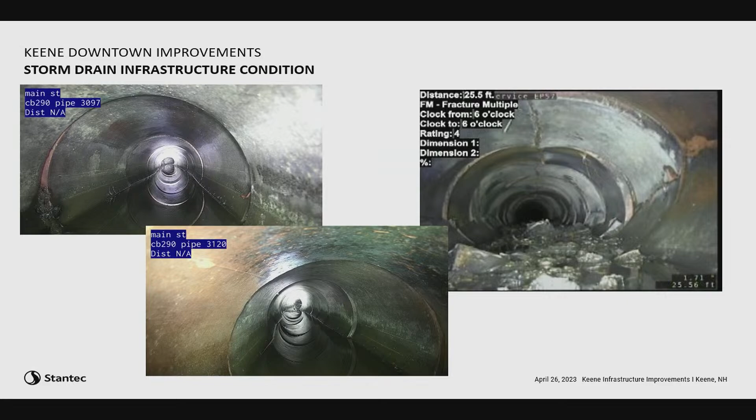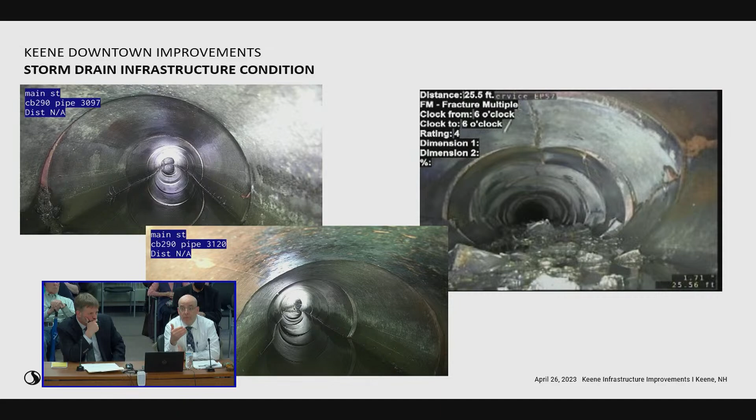These three photos happen to be from the central square, but most of the pipes on Main Street are 8 to 12 inch, and most of them, all of them, are undersized. The good news is that the drainage pipes on the downstream end, Roxbury Street, Railroad Square, and Water Street, have all been increased over the years on previous projects. So they're ready to receive more flow. We just got to get it there.

In addition to the underground problems, there are also above-ground issues with ponding and puddling in areas where the drainage isn't even getting to some of the catch basins. So what this shows is kind of a wholesale reconstruction of the drainage system. The exact locations of catch basins would have to be determined in the final design when curbing and the street layout is better known. But this is basically the intent here.

You can see running mostly down the middle would be a larger trunk line that will pick up the drainage from the catch basins on the edges. So every catch basin would run directly to that trunk line, which is going to improve the water quality a little bit as well, because it won't have water flowing catch basin to catch basin, stirring up the solids. The solids will be able to settle out in the catch basins, and the water will flow into that trunk line.

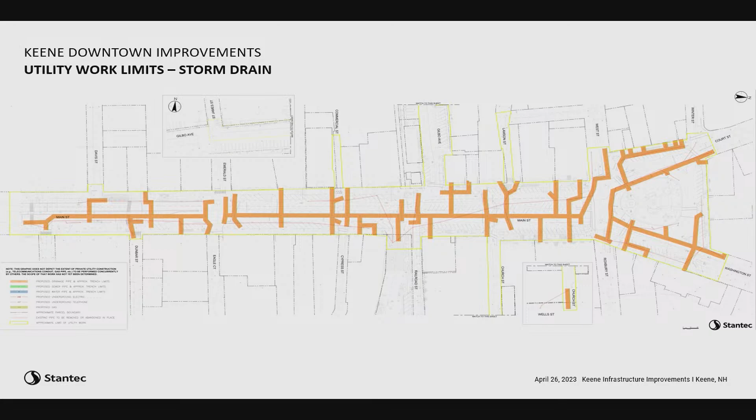That trunk line will then go to essentially the three different systems that Don just mentioned: Water, Railroad, and Roxbury. Those systems will stay together, and the water will flow into those. Overall, it's about 4,500 feet of pipe. That pipe's going to be 12 to 36 inches in diameter, and we're probably looking at roughly 100 structures between basins and manholes to move that around.

Okay, so the next system is going to be sewer, and I'm going to talk extra fast because I've been given 10 minutes. We got a quick question here. Councilor Greenwald: Where does this all exit?

The downstream end. So we're going to connect to the existing systems on Water Street, Railroad Square, and Roxbury. Those are the three big discharge points for the work. Gilbo, not Emerald? No, I don't think Emerald—there's anything that goes down Emerald Street. Gilbo, I think, would stay on its own.

So any improvements on Gilbo would stay on Gilbo. Most of Main Street goes to Railroad. The southern end from around Emerald south goes to Water. And then really the central square area all goes to Roxbury. But eventually it goes to the Ashuelot River. Everything, those three systems, Roxbury, Water, and Railroad, all go to Beaver Brook, and then to the Ashuelot River.

Gilbo Ave currently drains towards the Ashuelot, and that'll remain. Same with Lamson. Tom's got a quick question too.

So for that reason, if you wanted to section this up and do different parts, you wouldn't have too many problems, because it's not going down Main Street. Yeah, there's sort of logical phasing breakpoints that we've talked about, and we've shown some phasing plans that anticipated that. Unfortunately, those logical breakpoints aren't the same for all of the different utility systems. So in any case, when you're breaking it up and having some temporary work, there's going to be a little bit of that temporary configuration and rework the next spring, that sort of thing. But yeah, there are some logical breakpoints for phasing purposes.

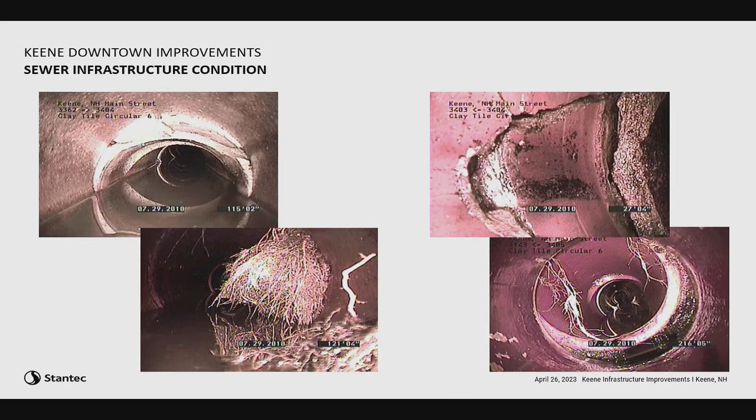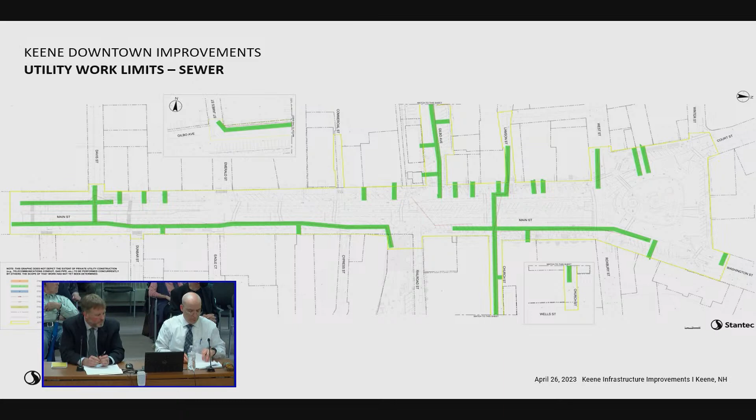That's some larger pipe that was lined in about 2004, so 15 or 20 years ago, running from about Davis up through Court. We wouldn't be doing any work on that, that pipe's in good shape. It's a little bit bigger than the 6-inch pipe on the northbound side.

There are some services along there that weren't upgraded at the time, and they have the same susceptibilities that the main and those pictures show, so those would be replaced. Then along the north side and a few of the side streets, that's where the smaller 6-inch clay is still in place. We'd upgrade that to an 8-inch and replace it all the way through there.

So in total, I think we're looking at about 3,000 feet of sewer pipe, 35 manholes, and about 20 to 25 services to be replaced as part of this work.

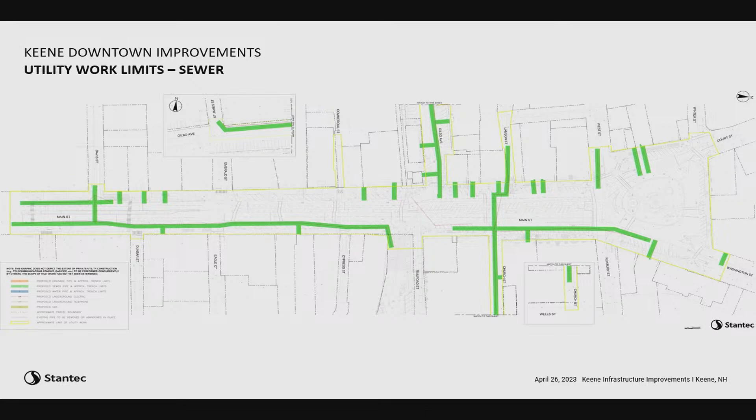Now, unfortunately, I don't have any cool pictures of the water system. We don't have any equipment that can look inside the water pipes while they're still in service. They do have systems that can do it, but we don't have that. So instead, I brought some props.

This is actually a service valve that would have served somebody's house. This one was taken off of the Court Street service. But if you use your imagination, picture this instead of 1 inch, is 6 inches and much bigger. But that was too big for me to bring.

You can see in here, and I'll pass this around, the mineral deposits that have collected. It restricts the flow, but the real issue is that if you needed to turn this valve off because there was a water main break or service interruption, this valve couldn't be relied on to shut off. You wouldn't be able to stop the flow of water.

And I'm sure you've all seen pipes like this. I bring them whenever we have these sorts of events. This is a water main section that was cut out from a project. It looks kind of gross. In actuality, it's just mineral deposits that have come out of solution in the water, and they've attracted themselves and made deposits on the pipe itself.

So it's safe to drink. It's a little off-putting to look at. The real issue is the loss of capacity. So for a 6-inch main, this one's not too bad, but they can get pretty heavily tuberculated. And at that point, when you need that main for fire flows, it doesn't have enough capacity to move the water.

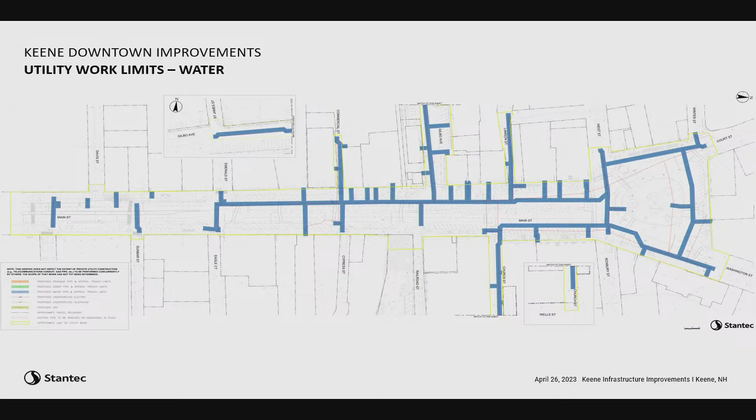Now, another question that we've gotten is, what evidence do we have that this work needs to be done, and what's the history of problems? So I did get a few stats from the water sewer crew. The cast iron water mains on Main Street, most of them were installed between 1891 and 1904, so they're well over 100 years. The average service life for a pipe like this, under best conditions, is about 100 years before we start seeing problems. So they're all past that.

In the last 3 years, we've responded to 4 water main breaks within the project limits. 2 were on Lamson, there was one at the intersection of Gilbo and St. James, and one at the intersection of Cypress and Main. So those were actual repairs.

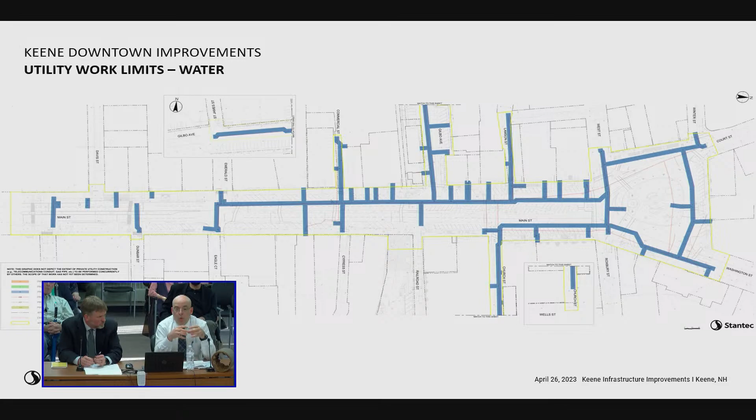The other component of the project that we talked a little bit about is the valves themselves. There's a number of valves through this project area. When one of them doesn't work, the issue becomes that you have to go to the next valve downstream in order to isolate the break.

And we saw that here with the Roxbury Street project a few years ago, where we were replacing valves in the Roxbury Street intersection. The valve that we had planned on using to isolate it couldn't get a shutdown. So as a result, in order to replace that, we had to go to the other end of that block at Church Street, and we ended up having to turn off water to the Fairfield Hotel for that day. That's the kind of disruptive thing that we're trying to avoid, where we're not able to plan for those sorts of things because we don't know what the failures are going to be.

In terms of sewer breaks, I didn't write that down, but there was a stat he gave me about Lamson Street. The pipe on Lamson Street, because of the issues there, they've had to respond to numerous calls and complaints about backing up. They've actually cleaned that pipe 56 times in the last 5 years, that one pipe.

So, you know, the question we get is like, well, what happens if we don't do this, or what if we put it off? And I won't tell you that the pipe is going to just collapse next year.

We're going to see more frequent problems and maintenance needs, which creates cost for staff time to address it and also creates a lot of disruptions for our customers. Just recently, Lindy's had a backup on a Saturday morning where they had to shut down because their sewer service was backed up. Those are the kinds of issues we can expect more of if we don't take care of these problems now.

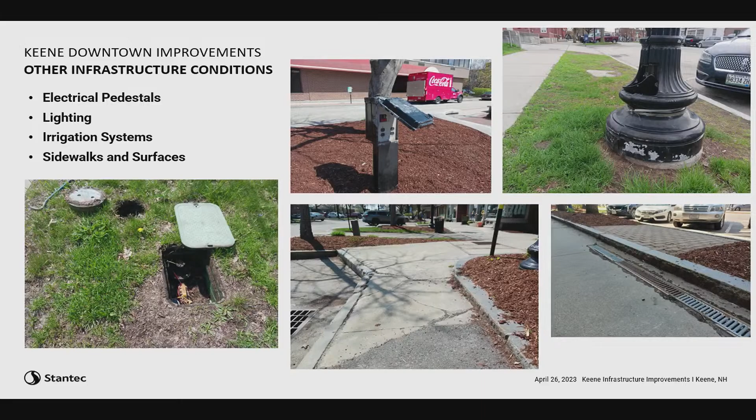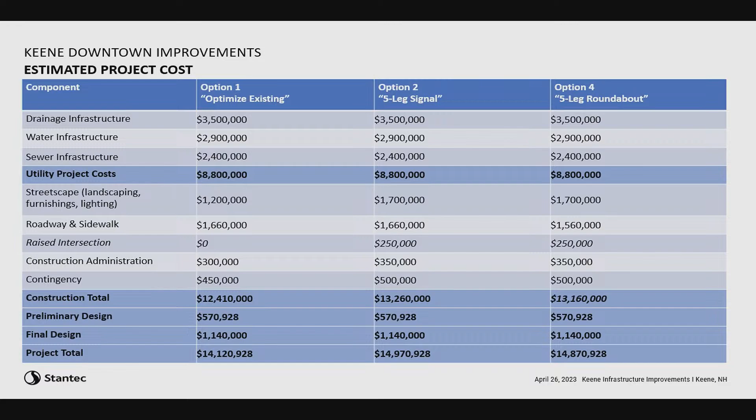With that, I'm going to hand it over to Court, unless there are other questions before I go.

Are all these prices in 2023 dollars, Chris? Correct, 2023 dollars.

All right, I will hand it off to Court to talk about the funding aspects. Hand it off to me - he's actually going to hand it off to me.

As you know, the downtown infrastructure project has been in the capital plan for many years, and the start of this project was in 2017.

So we have appropriated some money, and we have been building a capital reserve account in anticipation of this project.

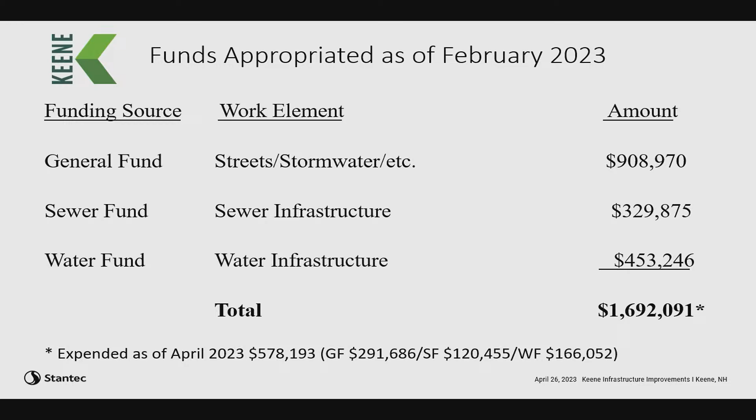And so we were planning for in the capital plan, $8.195 million. And we now know, as of, and you got this number the same time I did, well, I guess I got it a day before you, but the updated number for the concept work now is $14.9 million. And so the gap in funding that has not been included in the capital plan with these updated numbers is just over $6.7 million.

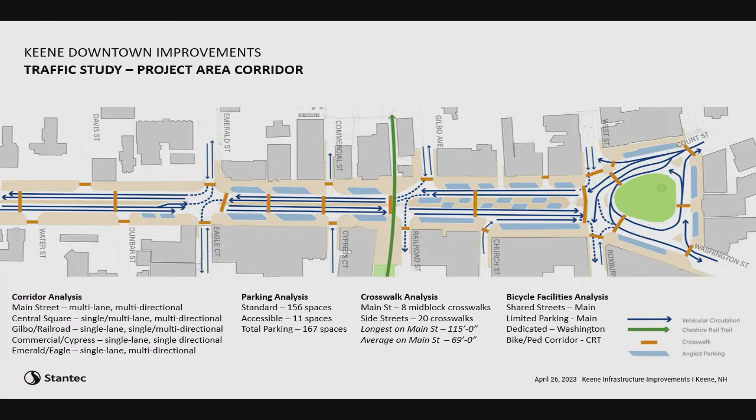This just outlines that project area. We were specifically tasked in our scope to look at four intersections, highlighted here. We wanted to understand the existing conditions, and essentially what improvements could be made, either on a large scale or a smaller scale, that would improve functionality or level of service. We'll talk about that quite a bit during this conversation, how each one interacts within the corridor. Those four intersections were at the top of the square, essentially including all of Central Square.

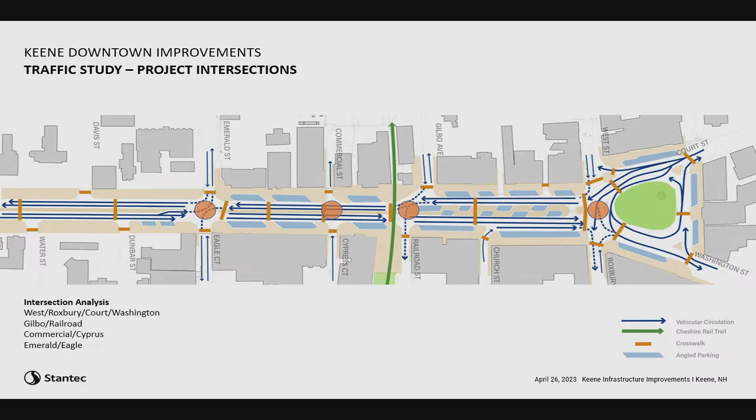That's the West Roxbury Court and Washington Street intersection. We looked at Gilbo and Railroad. We looked at Commercial and Cypress. And we looked at Emerald and Eagle.

There's also an important part of the traffic study to look at safety. Part of that safety is to look at crash analysis and any of the crash information. We were able to work closely with Public Works and police on three years of crash data.

So this is just a summary, part of the information we're putting together as part of the traffic study.

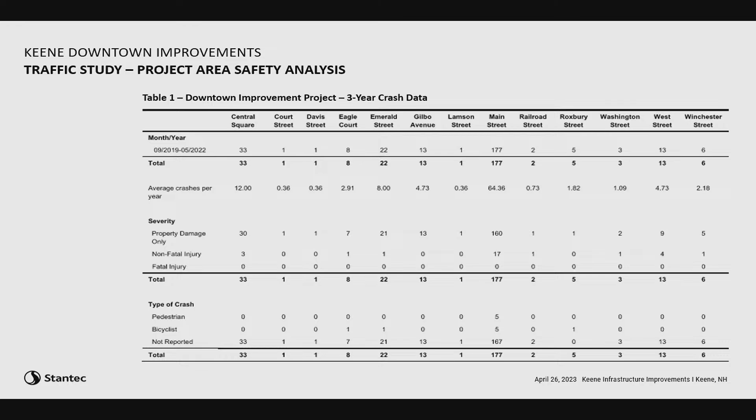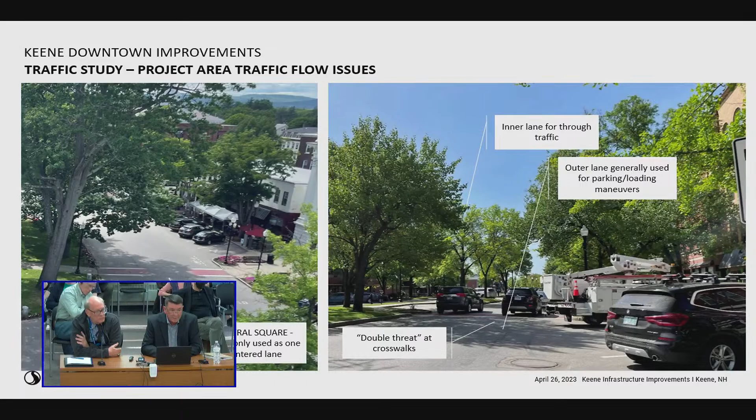The graphic on the right is a segment of southbound Main Street. You've got the two lanes right there. This was interesting because we happened to catch a picture of an electrical truck parked in a space that overhangs quite a bit into that outside lane. It's also parked adjacent to a crosswalk, which we heard a lot about from the public—what we call a double threat, basically when you have a mid-block crosswalk with multiple lanes, in this case two lanes southbound. That double threat means somebody standing on the crosswalk may be visible to a car in the outside lane, but not necessarily visible to a car in the inside lane. We see a lot of near misses here.

Part of the strategy we looked at was to eliminate the two lanes and go with a single lane southbound and northbound, to eliminate that threat, balancing out the corridor—we'll talk about that in a little while. A single lane operation has a way to eliminate this threat, as well as some of the speeds that a lot of folks talked about.

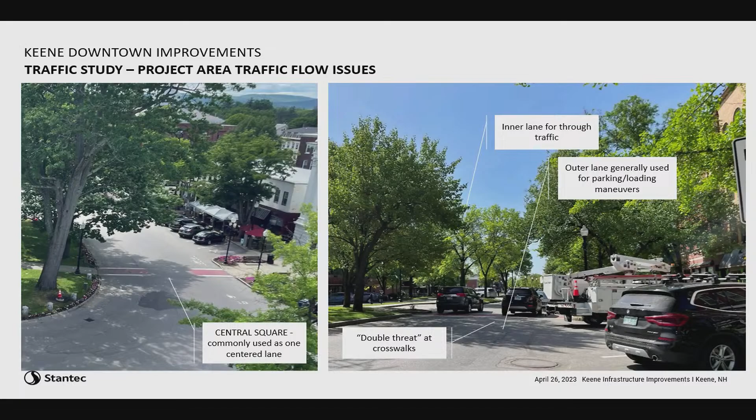This graphic on the left is really unique. When we modeled the Main West and Roxbury intersection, we saw the existing queues, but this doesn't really model well, because the existing condition is partly a result of the confusion right out here on Central Square—not knowing which lane to be in as you approach going northerly. I took this photo on a Thursday afternoon around 5:30, and that's about a 900-foot queue in a single lane along Main Street. That happens quite a bit.

I think a way to improve that would be to make sure that what's north of the intersection, where the signal is, has really clear guidelines, pavement markings, or signage so receiving vehicles know where they need to be. That's lending to the confusion and to the significant delays we see here.

The other photo shows a couple of pedestrians we caught jogging across the intersection, which is common along here. The intersection is very wide, with very long crosswalks and short crossing times, so all of that is another spot of risk, and creates the need to do risky things.

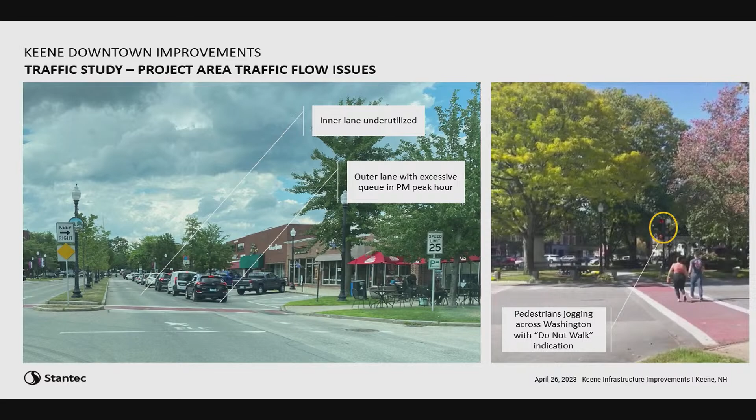So all of these existing conditions wrap up together with the data set. This happens to be the traffic counts. We used a lot of sources for our traffic counts—we physically counted cars for several days, counted pedestrians, counted bicycles, noted the number of trucks, noted the interference of parking, and inputted all of the data from the traffic signal timing systems.

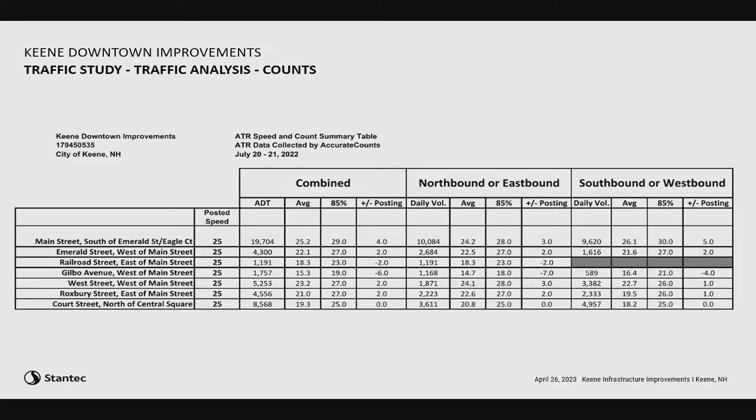We used a number of sources for the vehicles. This is just a quick summary, we'll show it graphically in a second. But we also looked at not only raw counts, but also turning movements to understand where all the vehicles are going. I know there's a lot of data on here.

Several things are really important that we'll talk about in terms of levels of service of the intersections. That's really how does that intersection operate. And it's a balance of queuing length and the time delay, typically in seconds. That's what you're starting to see right here.

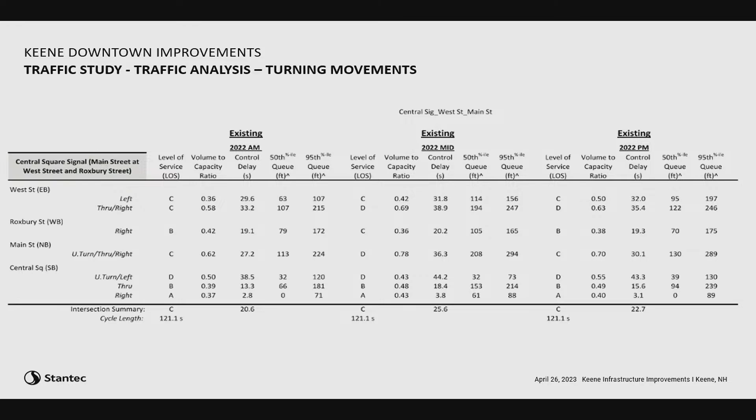There's also what we call a 50th percentile queue and a 95th percentile queue, and that is just the length of queuing that would be expected in the existing condition, as well as what we predict in the model for the future. The 50th percentile is essentially the average, the typical length of queue you'd see in normal operation. The 95th percentile is that really severe condition, 5% of the time you're going to see the most amount of traffic, and that's what's portrayed in the documents.

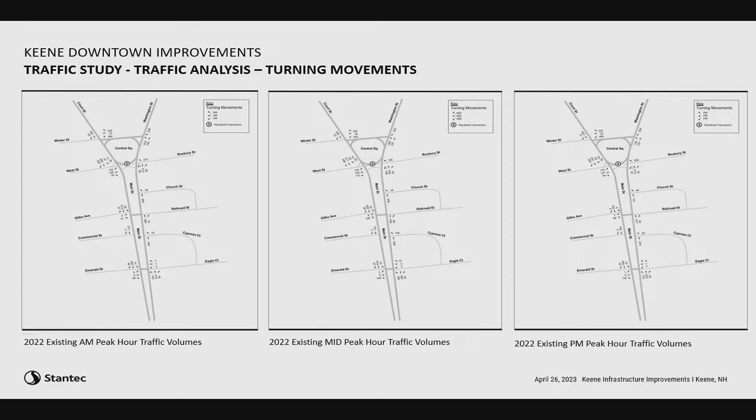So to quickly start to document this, these are just turning movements of the entire project corridor area, which shows all the turning movements from Water Street in the south to essentially Central Square to the north. These are in AM, midday, and PM peaks, just to understand what the peaks are on those two particular days.

We know that the predominance of traffic is along Main Street. There's a little over 10,000 northbound daily and about 9,600 southbound daily. And then we can see the splits as it gets to Central Square, where just about 7,000 cars are heading northerly to and from Washington Street, and then a little over 8,000 cars along Court Street. The side streets are represented here. We start to use this to predict where the traffic will be going and how it will respond to any alternatives.

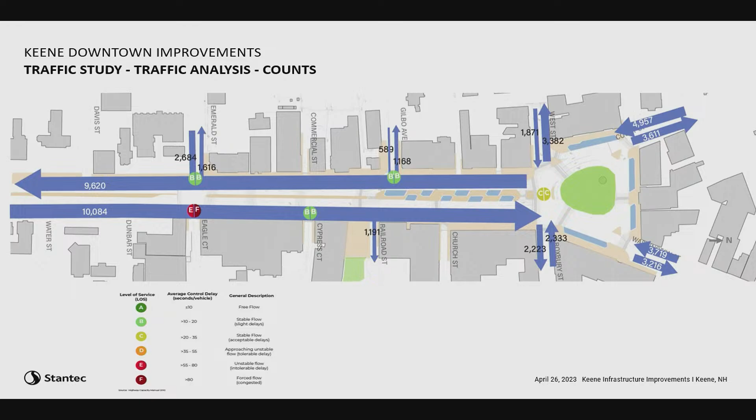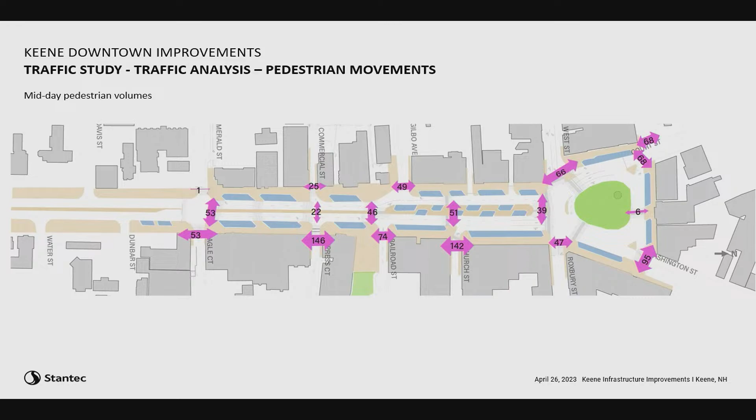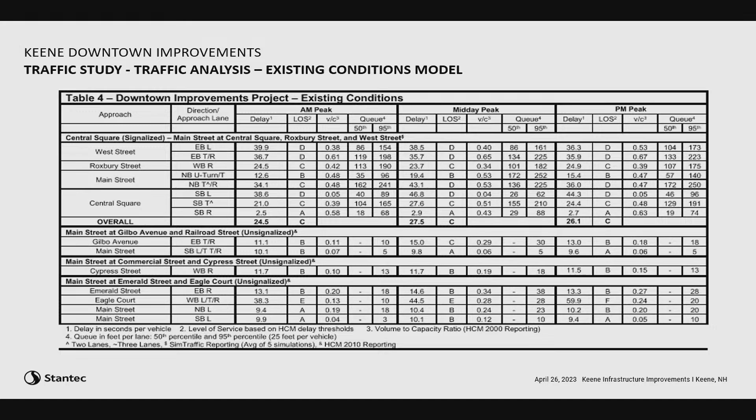So what does that look like? Well, it looks like this, and the traffic study report has a lot of tabular data like this. We're going to portray it in a graphic form to make it a little more interesting. This is looking at all of the subject intersections that we studied, and we'll talk about each of those approaches. This is essentially what Central Square, the existing condition, looks like today.

The traffic movements you see today are, generally, Roxbury heading westbound is a right turn only into Central Square. There are 3 lanes from northbound Main Street entering the intersection, and 2 lanes southbound on Main Street exiting the intersection. You can see all of the other paths that are going there.

We model this looking at those two factors I mentioned before: the AM or morning peak hour traffic, and the PM or afternoon peak hour. Typically, as you can see, the PM peak hour is larger. AM is in the pink color, PM is in the blue color, and you'll see that throughout. So these are just queue lengths and levels of service for each of the approach legs.

I got a question. Thank you, and just for my sake, really quickly, this is where it doesn't model out the fact that the left lane has 0 cars in it and the right lane has 900 feet. So it looks like it's only a little bit longer, but in reality that right lane takes 73% of the outbound traffic, from when I did the math on the last one, and the left lane takes 27. You just jumped ahead of me, but you're all right, exactly, sorry.

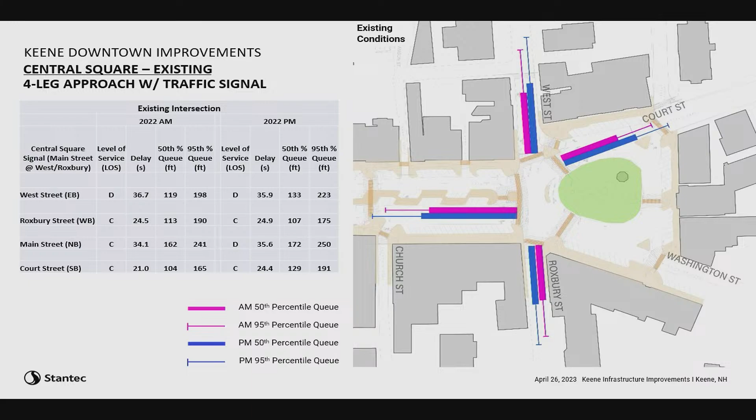As we get into these options, this is option 1, the optimized lanes and a new modern traffic signal. There are 2 factors that lead into optimizing what's out there today, and one of them is how we treat the pedestrian cycle. Today it's a push button and essentially an all-stop condition. All legs stop. We call it an exclusive pedestrian cycle, and that takes a lot of time out of the system.

In order to optimize it, we're suggesting that we would run a concurrent pedestrian cycle, almost like walk on the green. There are a number of ways to strategize how you do that. One operation is called a leading pedestrian interval. When it goes to a stop condition, before the light goes green for vehicles, it would start the pedestrian cycle and let folks start walking so vehicles can see that. Pedestrians have the right of way, not only here but everywhere, and this would give them a chance to start right away. So we're really optimizing the signal operation by going with concurrent, but I wanted to make sure you were aware of it.

Also, in modernizing the traffic signals, we have a lot of outdated red and yellow time in the cycles today that probably haven't been modified for a number of years, and also the crossing standards. Right now the crossing, particularly from north or east to west on Main Street, is 142 feet long. You can't make that in a single walk cycle, so usually you have people massed up in the center median. We're looking at ways to improve that by reducing that width and improving the time.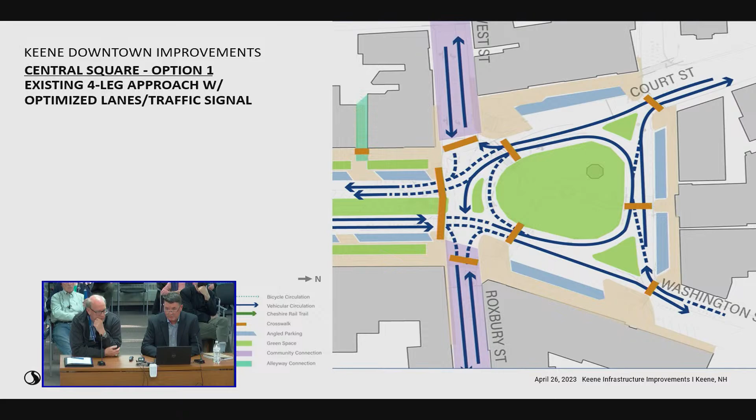Yeah, there's some confusion in the existing condition today. When optimizing that, we're not only looking at the signal but the lane operations too—narrowing some of these lanes, making them really noticeable, signed well and pavement marked well, and making sure the lanes are consolidated so there's not too much choice. That's part of the confusion, so that would address your issue. I would agree.

And again, the same analysis where we're looking at levels of service. Levels of service are comparable, and I have a slide a little later that will show all of them next to each other. So as you're looking at this, and folks that will be able to look at this at home, you can kind of see each of the alternatives along the way.

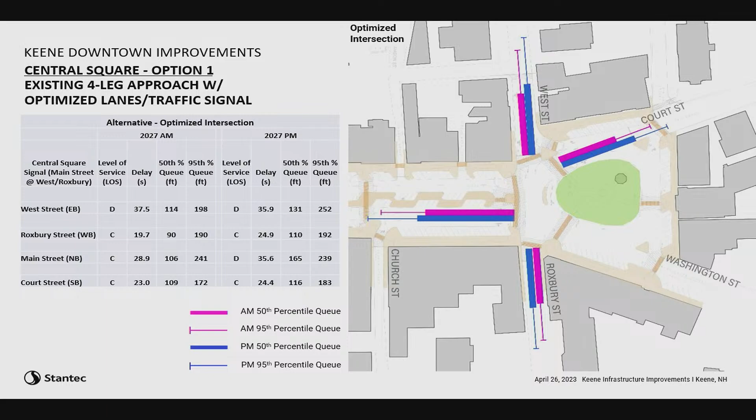There were some impacts to this option from the existing condition, mainly on some of the side streets. West Street got a little bit longer, Roxbury got a little bit longer. Main Street and Court Street, again based on just optimized signal timing design, where the legs that have the most traffic are usually given more time. Some of the sidelines tend to suffer at times, and it's a balancing act when you try to affect improvements right there.

Option 2 is to look at a new 5-leg approach. This is a full movement traffic signal, now including 2 directions on Main Street that isn't there today. So that 5-leg now comes in West, Court, Washington, Roxbury, and then Main Street. This option looked at maintaining the 2-lane Main Street in both directions.

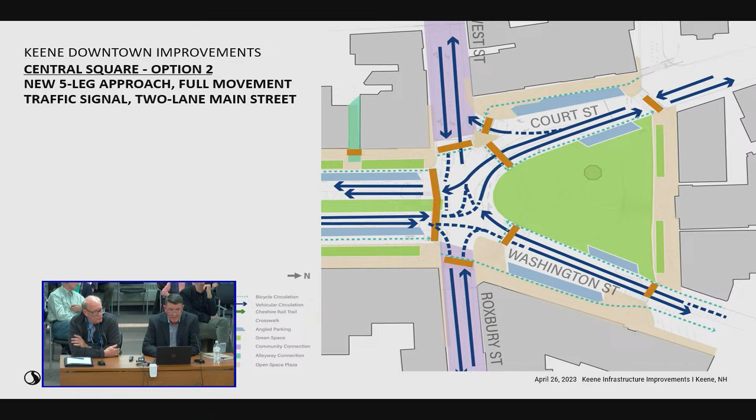We also did analysis for a single lane on Main Street going in both directions. I don't have that analysis up here. It did create some longer delays on some of the side streets that we thought would put the signal in failure, so we didn't pursue that any further, but certainly can share that. Part of that would be in our final report on the analysis.

We now see, again, generally maintaining that full traffic component. It allows us to clean up some of the crosswalk widths. It now has full movement feature at all legs, so the Roxbury movement, certainly Washington Street. And I will say that each of these options we looked at, as presented, have that leg at the top of Court Street blocked out. So that was the option we looked at with the advisory committee that expanded the green area of Central Square. We'll talk about that in a little bit.

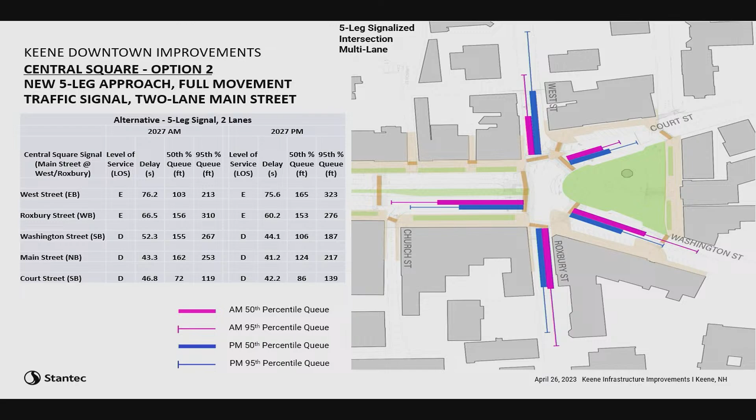So this is the modeling that we went through here. We looked at option 4, a roundabout located just south of Central Square, again looking at full movements. The roundabout, because of its deflection required for speed control and just processing vehicles, you can see that southbound Main Street is a single lane.

Northbound Main Street is 2 lanes, very similar to what the signal is today, although there's actually 3 lanes out at Main Street today. But it would be 2 lanes to distribute traffic, for a soft left and a hard left, and then a soft right, a hard right, and a soft right, if you're thinking about how you're going to get to Court Street and to Washington Street. And that modeling essentially looks like this.

Again, from a levels of service standpoint, this obviously has the highest levels of service. We'll look at that in just a comparison in a second. But you can see how each of those legs, roundabouts, they're designed to process a lot of traffic. We've seen how this can process traffic quite effectively.

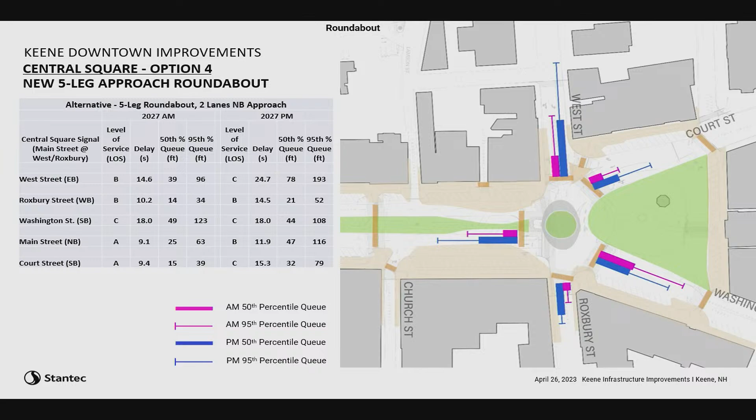We looked at a comparison of existing versus option 3, which is option 2, the signalized 5-leg intersection. And then we looked at the comparison of the roundabout and the levels of service. There's a lot of data sets in here, but you can now really see the comparisons from existing all the way through option optimized, option 5-leg signal, and option roundabout. That's essentially the levels of service, and as you can see, we're showing some fairly decent improvements.

There may be some additional delays on the 5-leg signal option, but certainly the value of having full access and mobility on each of the legs adds itself. So I'll use Roxbury Street as an example. Roxbury Street's delay might have gone up a little bit, but that's also avoiding having to go fully around the circle as you do today to either go southbound or up to Court Street or down West Street. So you have that ability, your travel time would be greatly improved, even though you might have a little additional delay at that one signal cycle.

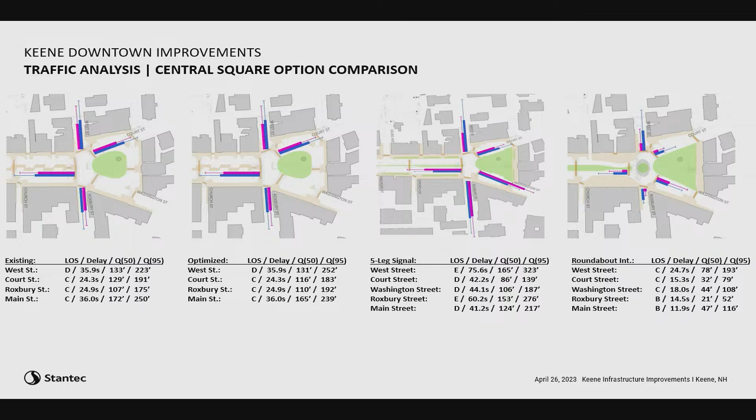That's the summary. I do want to bring up something that... go back. Thank you, I appreciate it. I want to go back to my issue that I'm talking about.

As I look at each of these pictures, I'm still wondering if I take that turn, I haven't seen in any of these how we fixed it to be able to come from Court Street, taking this inner circle, trying to get over here. And here's Roxbury Street, and which of these would fix that the best? I guess I'm asking.

Well, that's hard. I would say it's hard for me to describe what would fit the best for you, or anybody in that situation. But I think from a mobility standpoint, if you're on Court, or if you're on Roxbury and you want to come here, I think that's what you said, you would be taking a right turn, and you would have a direct shot in either of these solutions.

But if you're coming down Court, would we have to go all the way down to the next rotary to get back up? No. So with the traffic signal, I'll back up to the signal.

If you came down Court, you would essentially be able to take a left at the signal, then take another left up Washington Street as an operation of the traffic signal. It would be a two-part or two-stage left turn. That would be your movement.

With the roundabout, you would go around the roundabout to come up Washington Street. So you'd enter the roundabout, very similar to Winchester and Marlboro. You'd take that piece to make your essential left. In this case, you'd be doing a U-turn of sorts, using the full cycle of the roundabout.

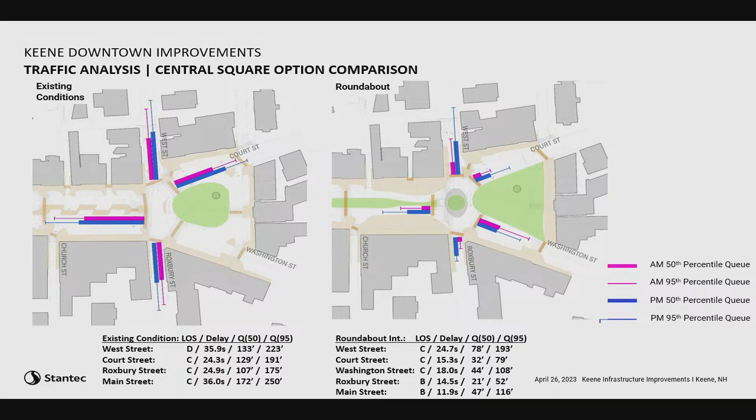I appreciate that, thank you. I've had people mention it to me too, it's not just me, but it's a real scary space. And if you're new drivers, which my grandson has been, it's just... thank you.

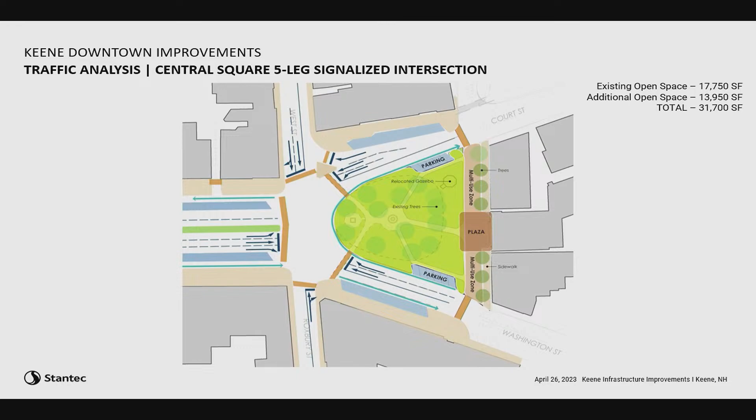It's a good point. So I wanted to briefly bring this up, the conversation related to the top of the square. What we showed at the two meetings, particularly this past February, and even your last meeting here with the council, was the concern that was out here. This was the layout as it sat with a signalized option and with the roundabout option, with that multi-use path and plaza space, mitigating the replacement of parking, and an illustrative perspective rendering of that.

We went back to look at what would and could happen if we were to look at having a single lane, putting that parking back and then widening. In this case, we were showing a 24-foot wide sidewalk along the building edge to fix a number of conditions that are out there. Just from a perspective here, that's how that would look.

Again, very similar to the Gilbo Railroad and Main Street raised intersection path, this could be all one elevation so that in the case of major events, you would be able to close that and have enough room. Really, the only difference from the previous sketch is there are additional bollards for the parking along the sidewalk that weren't there before.

So I wanted to outline that, and Bob is here to talk about any design details. Again, another benefit here is that there is still some additional open space gained. We were showing about 31,000 square feet of green area for the previous alternative; here it's about 25, almost 26,000 square feet.

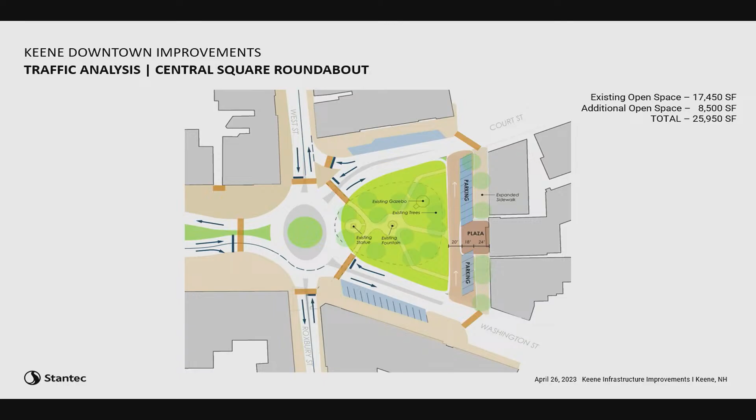Yeah. Yeah, it has the parking back in, yeah.

Sorry about that. I was asking about the parking, and if this plan adds in the 16 spaces or whatever that would be lost with the other plan. Those spaces would be replicated - they would be essentially the same spaces that are there today. So with this, no net change to parking in the downtown?

With the roundabout, I would say we had... I do have a parking slide I could go to. We were looking at a net - oh yeah, why don't you go back to that first. One of the things you'll notice is we made up the parking spaces that were lost at the head of the square on the sides here.

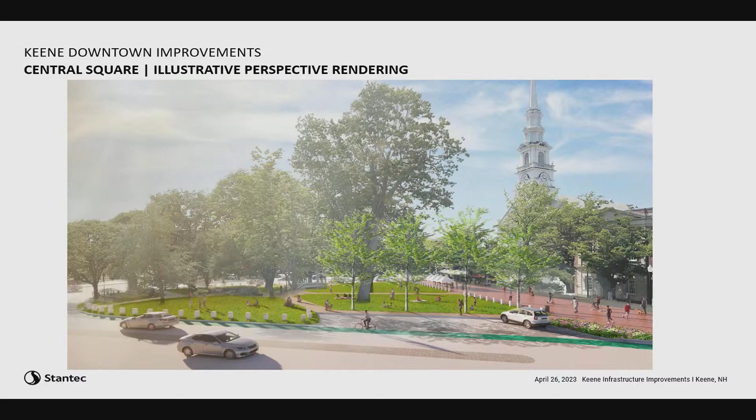That was the original proposal, so from the head of the square, there was no net loss of parking in either option. In the second option, you'll notice we removed the parking along the side of the common and put it back at the top of the common. So there is no net loss in the central square area.

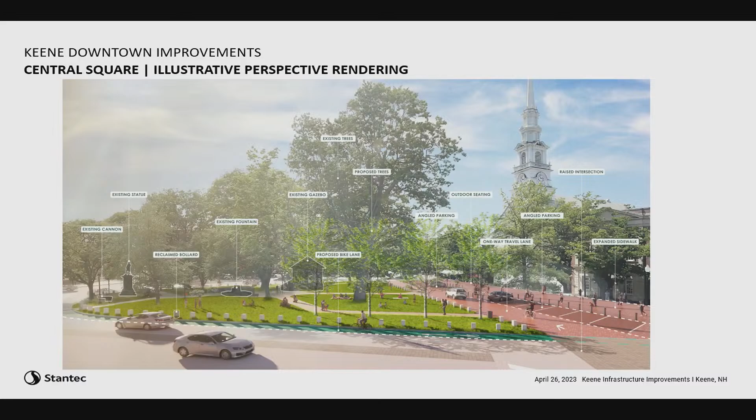That's correct. Okay. Councilor Remy. Thank you - I think I was probably one of the folks pushing for this.

The only thing I had been looking at this as reversing the direction of travel on that north side to prevent what you're talking about with folks coming in and out, and the effect on the traffic on Court and Washington, and how they would functionally have to loop around through Mechanic Street if they were not able to find what they needed, unless you reverse the direction of traffic in there.

One of the things we do need to look at is, imagine in this option, a car or several cars waiting to see a spot there, and whether that backs traffic up into either the signalized intersection or into the roundabout area. That's one of the concerns we'll need to take a look at to make sure that doesn't cause issues.

With the traffic signal analysis, is it considering very smart signals, meaning with trips and counters and optical detection to really fine tune it? Yeah, we would, because you really only have one signal along the corridor, so coordination wouldn't work for tying it into other signals. But absolutely, video detection would be really important, and programmers essentially learn along the way, so they start to predict adaptive control. We would look at trying to modernize as best as possible to improve on the fly.

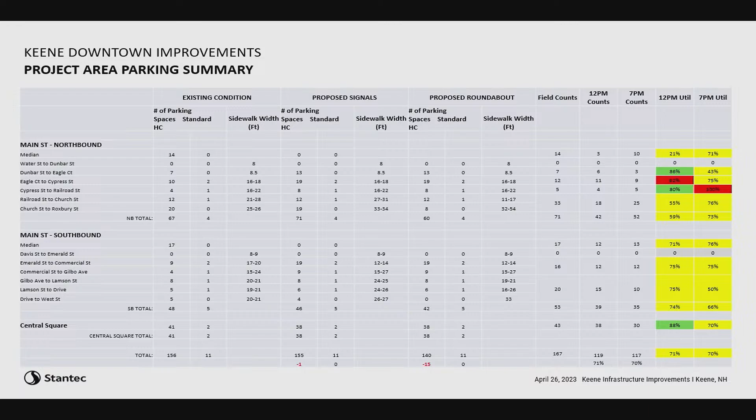We put together this parking slide a couple of meetings ago, and it outlines essentially block by block where the total parking is. This was a map that shows, again, a signalized intersection. The top of the square was looking at the option of expanding the angle parking that's on the inside of both Court Street and Washington Street, shown here. This just lays out the corridor.

The corridor, as it sits in this signalized option, was a net -1 space from the 167 spaces that are here today. And we know there are other opportunities. We've talked about opportunities to expand parking on West Street.

For example, if a roundabout is considered with a single lane approaching the intersection, that entrance to West Street with a roundabout, there's opportunity to add a number of spaces along West Street where there isn't space to do that now. And also in the south end, there's a block just south of the Cumberland Farms block that we could use.

Again, we try to value a parking space in the north of Main Street isn't the same as the south. But who's to say the south won't expand and your downtown gets a little bit longer in the future? So there are opportunities there.

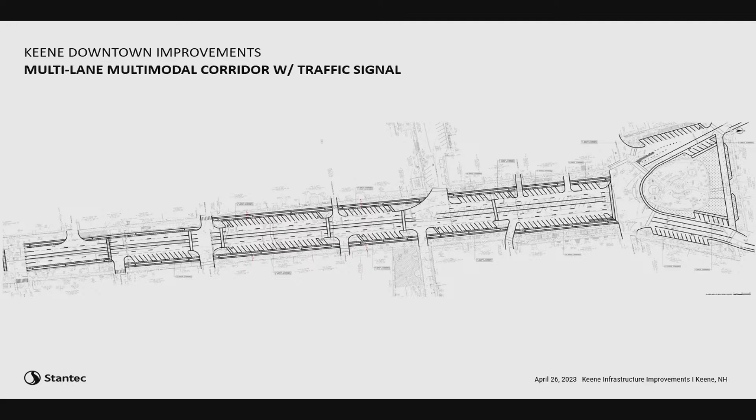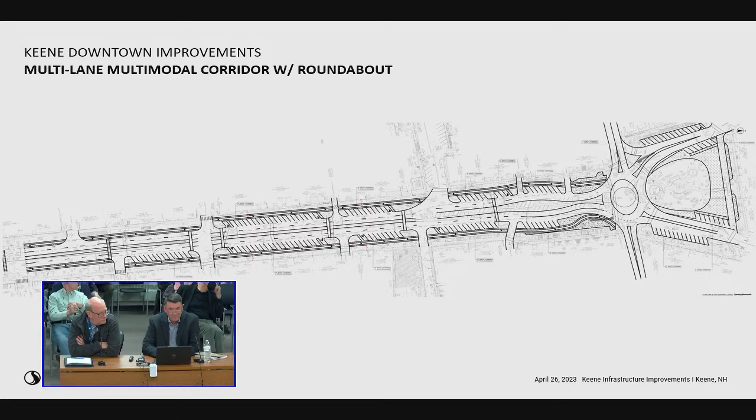This next one is really in the roundabout, so you can see where most of that 15-space impact is, really in the deflection into the roundabout northbound on Main Street and then out of the roundabout going southbound on Main Street. That first block area would be very difficult to have on-street parking, so that's where the number of spaces would be affected.

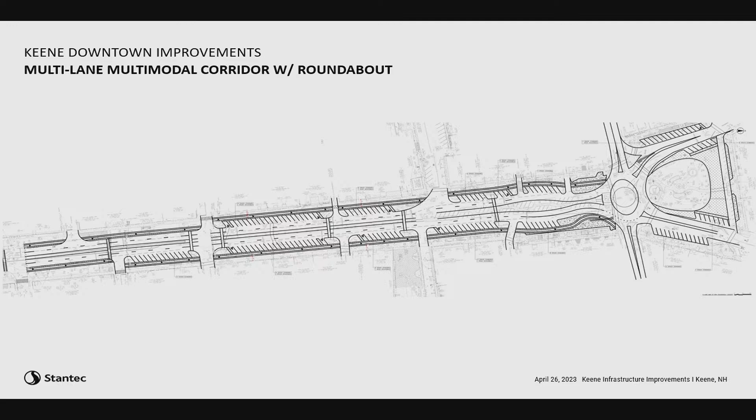So that's really the summary I wanted to present today, and we're here to answer any questions you might have. Thank you.

Thank you. Any questions or comments, discussion from the council? I saw Counselor Remy, then Counselor Johnson.

Thank you very much for pulling all that together, that was really wonderful. I know we've seen a lot of this before in different slides and formats online, but having it pulled together so we can sit in one room and think through it is great. My favorite slide out of the whole thing is probably the 4 side-by-side traffic pieces, and being able to see that comparison, because I know that's been a question a lot of us have had.

And it's much more dramatic than I thought when I saw the difference in what a roundabout does versus what the rest of the setups do.

And I really appreciate that you pulled together the parking slide to show the parking added back on top. I personally would prefer coming from the other direction to create ability to cycle through and back into the circle, but I think it's great to see what that would look like, and the visualization was great. So thank you. Counselor Johnson?

Yes, thank you. I wanted to go back to Counselor... your comments. I beg your pardon, I get so excited I lose track.

Anyhow, if I'm coming up on Main Street and I want to cut over to West Street, by rights we should stay in that left lane. However, then I get up there around Court Street, then what happens? That's my question, and that's a hard spot for a lot of people. No wonder we cut across. Do you understand where I'm at?

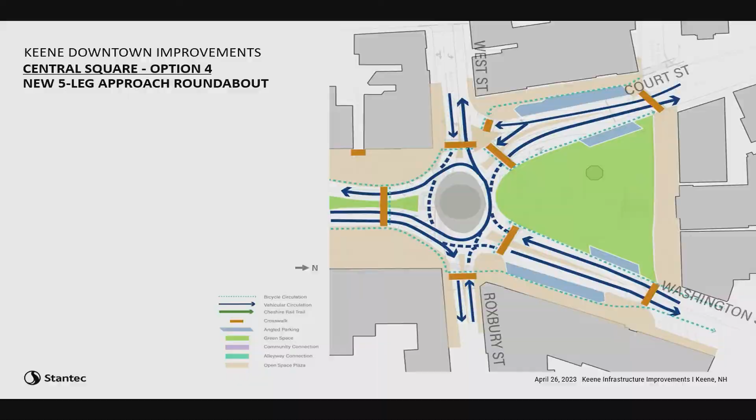There's a lot of points of conflict in the current design, and a lot of points of conflict in the signalized design. I like the roundabout because it solves most of them, but there's one that's really bad from what I can see, which is coming off of West Street and trying to get onto Roxbury Street. That's the only one I can see that seems like it will be a challenge because of the 2 lanes coming across, and I'm curious for any feedback on either West or Court coming onto Roxbury Street. Seems like it will be a challenge from a flow perspective. Other than that, it solves almost all the points of conflict, which is much better than some of the stuff we have right now, but that's the only one I'm curious if anything can be done about, because it's 2 lanes coming through there. I think one of the things to be thinking about is if you haven't experienced Key Road and Winchester Street yet—

If you think about that, that's what we refer to as a modified roundabout, where you have the 2 lanes coming in and then 1 lane across the top. So if you're going from Key Road over to the plaza, you're using 1 lane to get across. So in many ways the roundabout may look like it could have conflicts, but it actually works even right now under construction, now that they have it curved out. I encourage you to think of that experience of heavy north-south traffic and lighter east-west, that's sort of our Key Road, Winchester Street right now.

And you're making me realize this is also Lower Main Street—the Lower Main Street intersection is the exact same as this. I think Winchester Street is also modified, with one lane across the top, north and south ends, but 2 lanes going around. We have about 10,000 cars today going through down below. This community has become very comfortable working with these modified styles of roundabouts.

No, I appreciate that—it made me think of Lower Main Street, which is the same. So with the roundabout, it seems like it moves the cars most effectively, but is that always true? Is there an upper limit to the efficiency of roundabouts with a high level of traffic where it doesn't work as well?

I would say that it could. We're looking at what the predominant movement is here, and most of that is nearly through movement. There's not a lot of east-west interference that would create a large backup or conflict points in the flow. There's also enough gaps in the traffic lines that allows the sidelines to go. Where we have 19,000 cars a day on Main Street turning into 7,000 and 8,000 plus on Washington and Court, I think it processes very well.

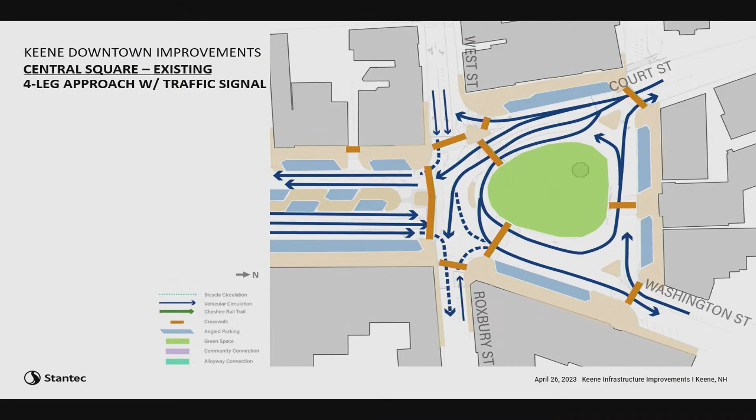I'll try to address what we've looked at. A roundabout really comes down to the deflections — you need those deflections to slow traffic down. To create that while maintaining the same cross sections that are there, you won't get the needed deflections. So that's always been the challenge: can we convert Central Square to a roundabout? Because of this egg shape that was created over time, that's very difficult without taking lanes out.

So for example, if we were to take out the right turn on the Roxbury, then you can do it. But then you start running into some other challenges. So we've looked at it off and on over the years.

Certainly putting in a light system to stop traffic, say for the emergency services, again, you can do that. You can do that on the roundabout. You just have to take a look to make sure that there's enough space from queuing lengths, et cetera.

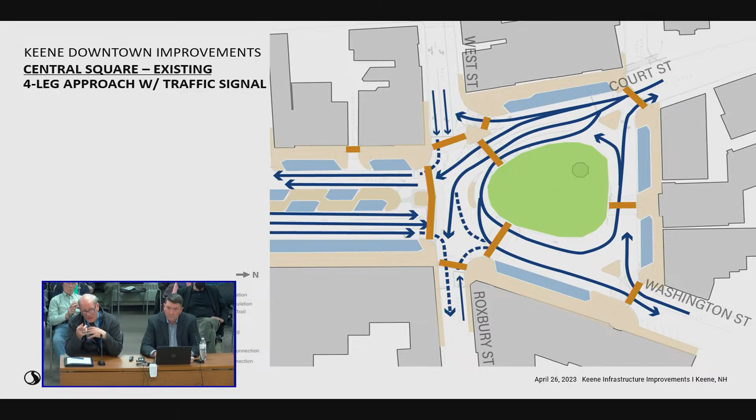Part of the reason certainly today is because coming into it, vehicles move into Central Square to get out of Washington Street. That's why they go against traffic coming northbound, because they don't have to make the right and go around that way. The vehicles just go through. So you could do it, but there would be some interesting additional movements that probably would have to be taken into account.

Sorry, thanks for calling me on again, Your Honor.

I don't buy the fire truck piece just because we have so many roundabouts already that the fire trucks are able to maneuver through and people don't just freeze in the middle of them and block traffic. We're able to get there today. If anybody on Marlborough Street has a fire, there's a fire truck going around a roundabout today that has a single lane on the bottom that somebody could in theory freeze in, but we're able to get there. So I get the theory, I just don't buy that it really would happen that way. Maybe once in a while, but that's why they have the really loud sirens on the horn.

Anybody else? All right, well, thank you. I think that was very helpful. Appreciate it. Thank you. So, with 5 minutes to spare, we're going to go into the public portion.